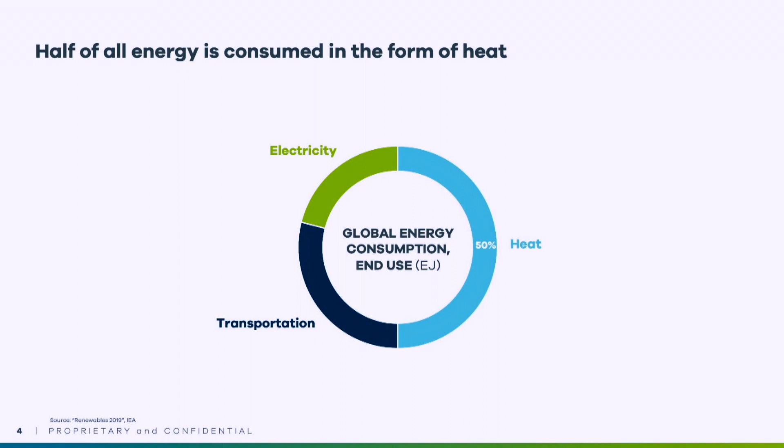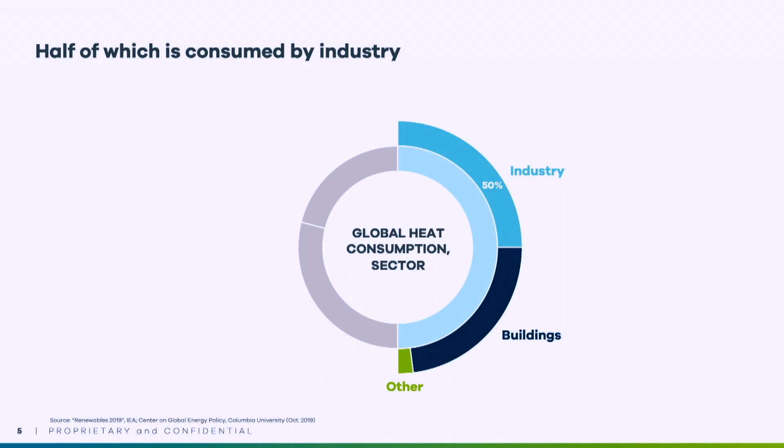So because it's so little known, the first step of my project was to communicate and understand the scale of the problem, and I'll share that with you today as well. So if you break down all of the global energy end uses in our world, half of it is in the form of heat. And about half of heat goes towards cooling and heating buildings, but the other half goes towards industry. And most of that heat that's consumed by industry is created by combusting fossil fuels, making industrial heat responsible for 10% of global emissions.

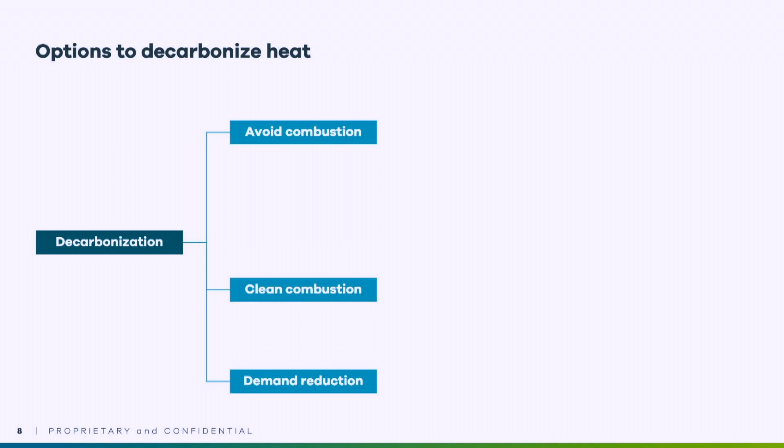So once that problem statement is clear, the idea of my project was to lay out the various pathways for decarbonization and form a perspective on what the most attractive options were. And I'll share a very condensed version of that analysis and recommendation with you all today. So there are multiple pathways for decarbonization, and they can be mainly grouped into 3 categories: 1, avoiding combustion, 2, cleaner combustion, or 3, reducing demand for heat.

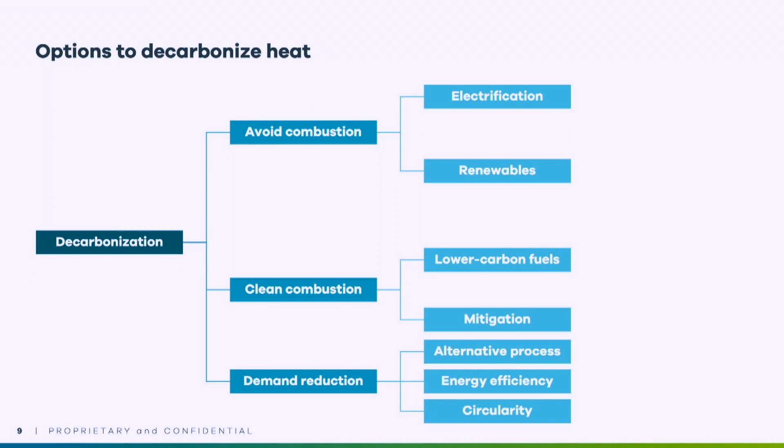And those pathways can be broken down further into various strategies. And within those strategies, there are also multiple technological pathways that you could take. In my project, I focused on this branch of avoiding combustion. Cleaner combustion and demand reduction certainly have roles to play in decarbonizing heat. But topics like hydrogen and carbon capture are super broad subjects in themselves that could be entire projects, and they go well beyond the scope of industrial heat. So today, for time's sake, we're focusing on this pathway of avoiding combustion.

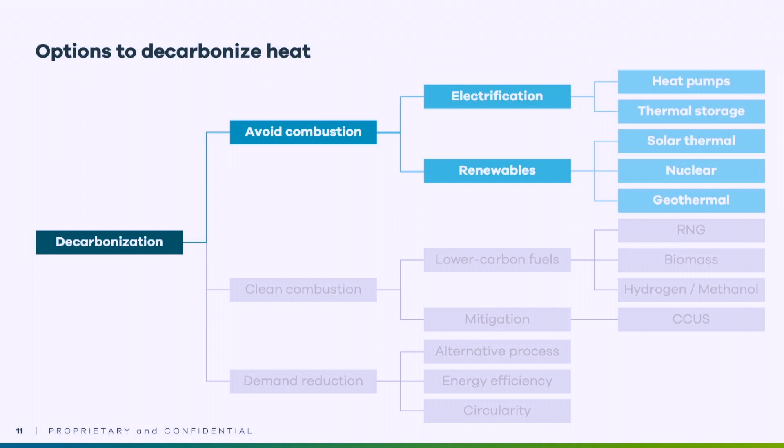But even within this pathway, there's at least 5 different technological pathways that you could take. So first, I needed to come up with a framework for consideration and prioritization of these technologies. So I came up with these 3 criteria. First is, what is the addressable market, which here is basically synonymous with what is the addressable temperature range. Different technologies are capable of addressing different temperature ranges, and different industries require different temperature ranges. So temperature and market size are closely correlated.

Second, what is the levelized cost of heat? This is similar to the concept of levelized cost of electricity that a lot of us might be familiar with, but essentially it's a standardized financial metric that you can use to compare the costs of different sources of heat on a like-for-like basis. The important thing here is that there's a near-term path to cost competitiveness with fossil fuels. Because heat is a commodity, if it's not competitive with fossil fuels, it's unlikely to gain commercial traction.

And third, what is the availability of this technology? And that is availability across multiple dimensions, from natural resource availability, physical availability to technical availability. And what you want is a technology that's readily available in the near term across your target markets.

So when you compare your 5 electrification and renewable technologies against these 3 considerations, what I found was that nuclear and geothermal are not projected to be LCOH competitive in the near term. And solar thermal also has limitations around the natural resource requirements and land requirements. So I chose to focus my analysis on these 2 strategies of electrification of industrial heat through industrial heat pumps and thermal energy storage.

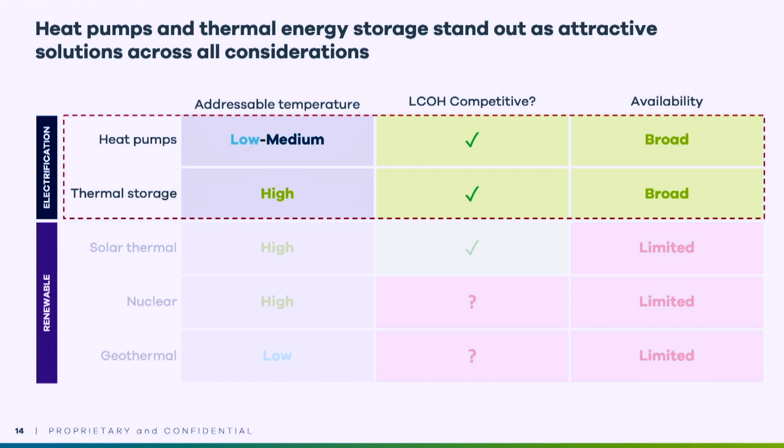These 2 technologies are also highly compatible in that industrial heat pumps address low to medium temperatures of up to about 200 to 250 degrees, and thermal energy storage can address higher temperatures of up to 1800 degrees Celsius.

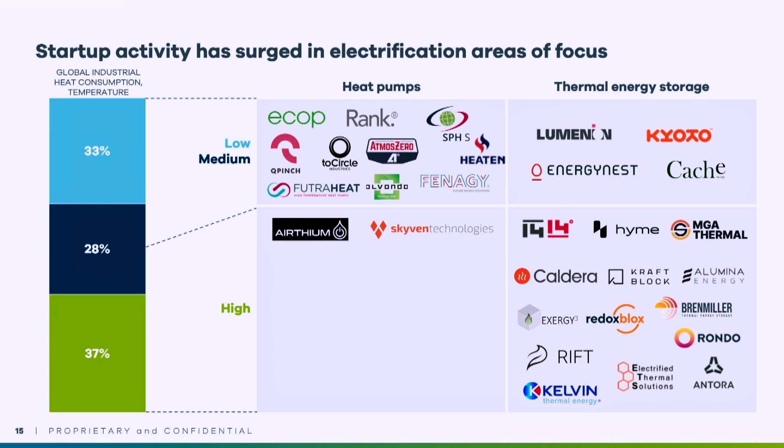Another reason that this space is so attractive is that there's a lot of innovation and startup activity and capital flowing into this space. So there's a strong ecosystem there already. And through my project, I talked to a lot of the companies that you see on this page to learn about their technologies and teams and business models. And the output ended up being quite detailed, but I'll sum it up for you in 2 pages, one for heat pumps and one for thermal energy storage.

So starting with heat pumps, like residential heat pumps, which is Pat and Oren's favorite topic, industrial heat pumps move heat from one place to another using electricity. And because of the mechanism of moving heat instead of creating heat, they have an efficiency advantage of 2 to 3 times more efficient than natural gas.

Most startups in the industrial heat pump space have been innovating on their product designs to push up the upper bound of addressable temperatures. Previously, temperatures were limited to 100 degrees Celsius or less. Now with these new innovations, temperatures are reaching 200 to 250 degrees Celsius, which opens up a number of new industrial applications. However, a lot of these startups are quite early in proving out their technical ability to meet these super high temperatures, so there's still a good amount of technical risk remaining.

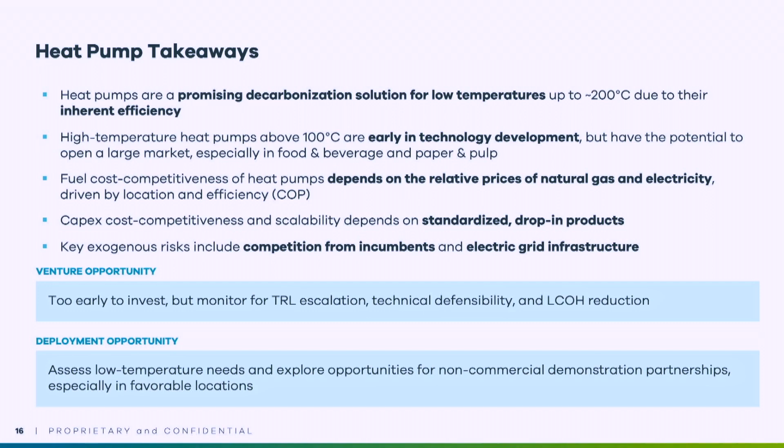On the economic side, for LCOH, the costs of fuel have become more attractive in that electricity prices have gone down and natural gas prices have gone up in certain geographies due to a combination of market factors like the war in Ukraine and to carbon taxes. On the CapEx side as well, startups are innovating to bring down that cost by simplifying their system designs and achieving economies of scale.

So in sum on this page, on the venture side, PIVA invests in the Series B stage, so heat pumps are still a little bit early for us given the technical risk remaining, but a really good space to keep an eye on as these companies continue to develop over the next couple of years. And on the company side, there may be an opportunity to engage in early demonstration partnerships with some of these startups.

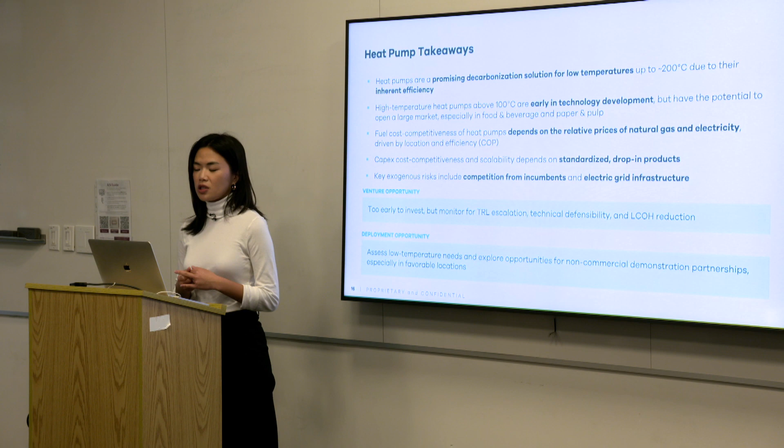So thermal energy storage is similar to any other type of storage in that it heats up when electricity prices are really low and then discharges a continuous stream of heat. And again, the startups here are pushing up the maximum addressable temperatures and have gotten hot enough to be able to address some of the most heat-intensive industries like cement and steel.

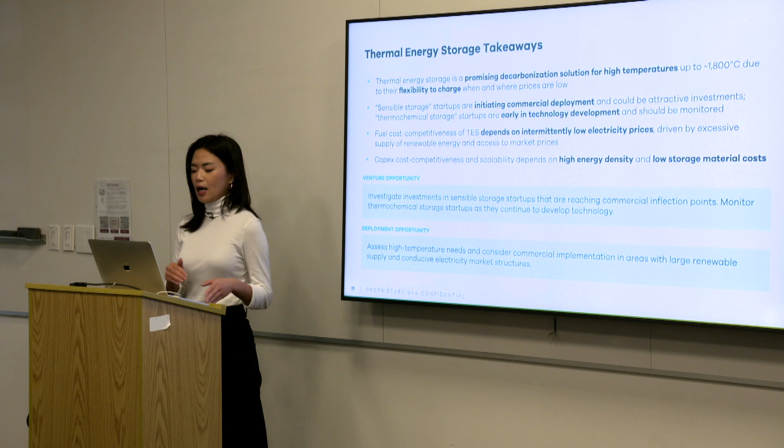On the economic side, their economics depend on being able to charge at extremely low costs of electricity for at least a few hours a day, which oftentimes requires pretty creative economic arrangements. On the CapEx side, they're working on pushing down that cost through their choice of storage materials and system designs, which trade off between cost, energy density, flexibility, safety, and a number of other factors.

So a couple of these startups are reaching commercial inflection points, making them strong candidates for investment. For example, there's 2 thermal energy storage companies called Antora and Rondo that you may have heard of that are right here in the Bay Area. We've actually been talking to both of them.

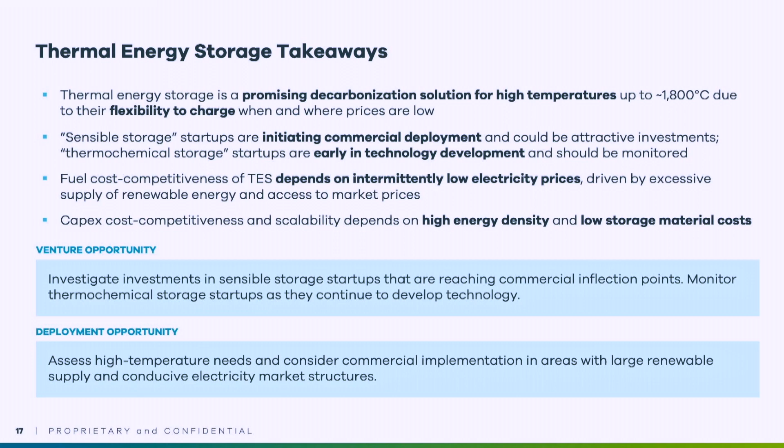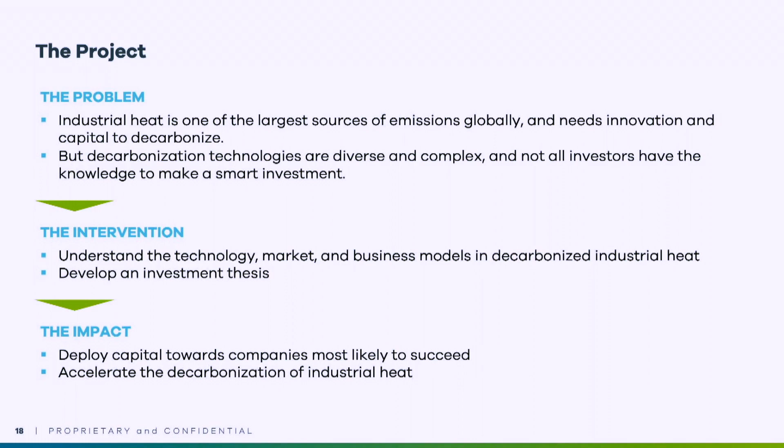So these 2 companies, among the other companies that we discussed, illustrate why venture capital is crucial to decarbonization, in that they're very capital-intensive businesses that need investors willing to take on the risk to bridge them to profitability. So the hope is that with this thesis, it helps investors get more comfortable in this space and understand the value propositions and risks and deploy capital in a more informed way. That should hopefully accelerate the decarbonization of 1/10 of global emissions that industrial heat creates and help us reach our net zero goals. Thank you.

Awesome presentation, Claire. Curious, I know you said the heat pump space is a little early for PIVA now, but are there any companies that excite you even in the very early stages?

Yeah, definitely. One unique company is an American company called Atmos Zero, and their differentiator is that the source of their heat is the direct ambient air. Most of the other heat pump companies are utilizing waste heat from other parts of the industrial facility. So obviously that's a lot more challenging in that they're starting from a lower temperature and still trying to achieve that 200, 220 degrees Celsius range. And they're still proving out how they're going to be able to do that.

But the benefit is that it simplifies the product design. Instead of connecting the waste heat source to the heat sink source, you can just connect it to the outside air and it becomes much easier to implement in the facility.

I'm curious about the optimal temperature ranges that are economically most viable right now, because heat pumps you mentioned going up to 200 degrees Celsius, and thermal storage 1,800. I can imagine that for both of those solutions, there's an optimal range and a maximum range. What are some of the applications right now that you think are within the optimal range? And what are the stages of who you go after first on the demand side?